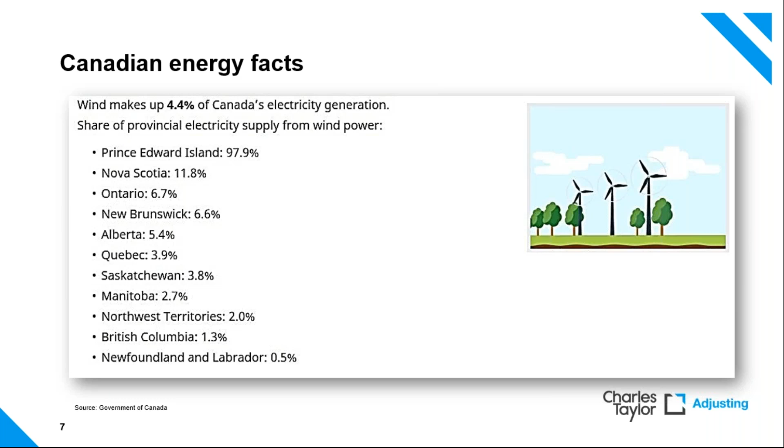We have done a number of claims in support of the insurance community, certainly in London, in a number of these provinces across the country, and certainly the most recent one was in PEI, the first one there. So we can see there's a very diverse but consistent share in the majority of those provinces.

Now, if we're moving on to claims, the dreaded word here, I'm sure there are people who deal in pre-loss on this call, underwriters or brokers and the like. Sadly, we're at the grubby end, as it were, of the claim side when things go less well than they'd hoped. And so this view here gives us some of the things that we've seen both in the European market and also in the Canadian domestic market as well.

Here's three generic kinds of damage, broadly broken down into blade damage, electrical infrastructure, and then drivetrain stroke gearbox failures. Blade damage itself tends to be one of those things which is perhaps more natural forces, act of God, that kind of thing—lightning strikes, strong winds, we see damage.

Erosion is one of those things which becomes a little more esoteric, on the basis that it tends to be more of a wear and tear point, in terms of the fact it's wind-blown debris, which either causes wear to the leading edge or the trailing edge of the blades. The blades themselves are composite and so forth, and they either have to be repaired or replaced. But we're not looking at specific claim issues here today—I just want to bring it to your attention that it's something we do see, and certainly on the older installations.

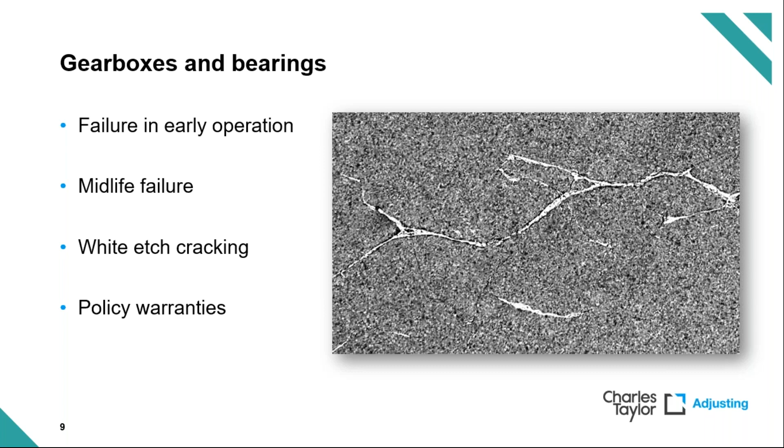Now, some of the opportunities and challenges that come with this - we've seen, and this is perhaps, we're talking onshore wind, I'd refer you to Canada and also North America for that state of the word. In terms of the concept to repair duration, clearly it's not a complicated structure. However, it's typically a tall structure, and typically in a fairly remote location. So what might be a fairly straightforward repair if taken in a metropolitan area, in a factory or other mechanical process or location, will take an extended period of time.

With that also comes the supply chain. You'll be aware that I mentioned earlier that a lot of the supply chain or the intellectual property sits outside of North America or Canada and comes from Europe. And we've certainly seen instances where that has significantly delayed claims, because things have had to be shipped both into country and then moved cross country to be able to rectify the problem.

One example that comes to mind exactly: dealing with a wind farm loss, relatively minor, in British Columbia, which took place in the late autumn, and due to the snowpack, it wasn't actually possible to fix the issue until the late spring. Now, supply resilience is something which probably wouldn't have even been mentioned 3 or 4 years ago in a presentation such as this.

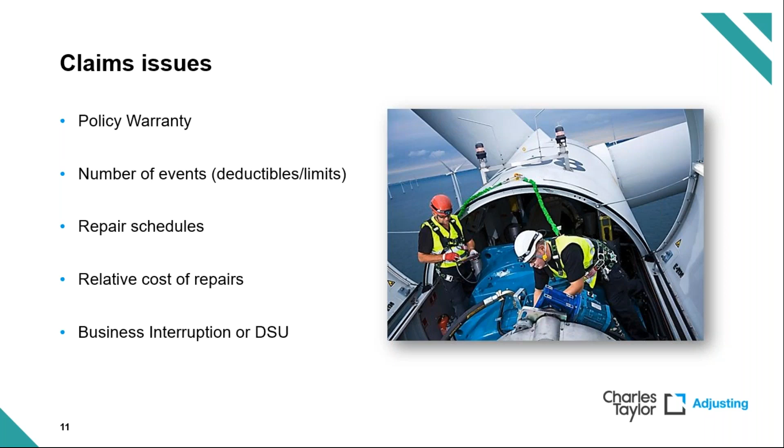In terms of that, then that neatly dives into the time-based element of business interruption, or indeed delay in startup, DSU. It's something that we see increasingly often. Maybe it's a sign of the times that often the business interruption here is perhaps a greater cost than the cost of repairs in numerous cases, and is something that we're well aware of, and therefore try and work with the insured to make sure that everyone is very clear on what the actual repair timeline looks like.

Now, just as a segue into perhaps more of our world in Europe of what this looks like, and to see the similarities, and perhaps based on what we said about the cross-pollination of offshore to onshore technologies, here is a schematic which shows, broadly speaking, how the two align. The first thing you'll probably notice is they're broadly similar. There are turbines, albeit the turbines are at sea or on some form of platforms or supports. There are array cables, exactly the same as onshore ones. The only major difference is there's typically an offshore substation and then an export cable to bring it onshore.

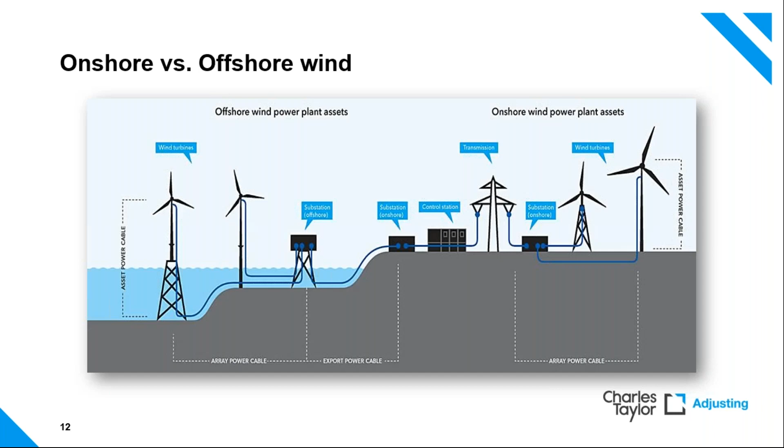Now, clearly, that doesn't happen in terms of the onshore facilities, but you could look at the export cable as being the overhead conductors on pylons. It's a similar idea. So I think what we're saying here is it's not that foreign, other than the fact that there is the marine component to it.

Offshore wind turbines, again, very similar to onshore wind turbines, just basically bigger is the best way to look at it. Again, a lot of this stuff is driven out of Europe with the main OEMs: MHI, Vestas, Siemens Gamesa, Amalgamation, etc. The typical new deployments are 8 to 9 megawatts, maybe 10. Although there was a piece in the trade press recently suggesting that the new development in the North Sea on the Dogger Bank, which is to the east of the United Kingdom, has an order placed for 14 megawatt units.

So clearly that is a substantial sea change in terms of size. And given that these are multi-billion euro assets in terms of the wind farm developments themselves, they're now very much seen as investment grade assets in Europe.

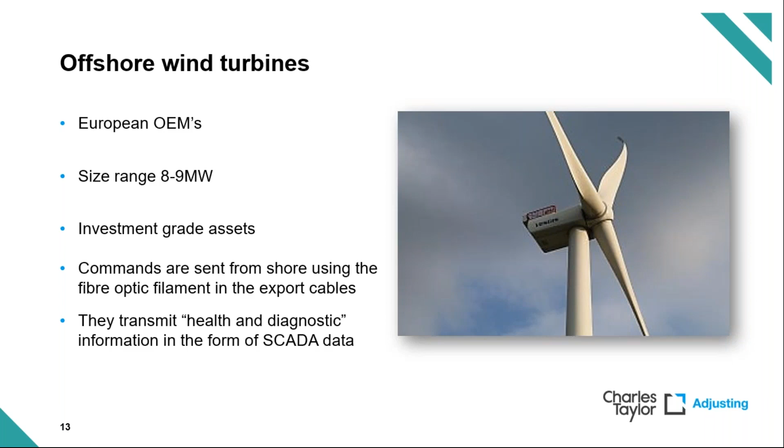Things like pension funds, financial institutions, and government bonds are buying into them, and that's largely how they're financed. On a more operational level, they're run from shore. All of the command and control is done through fiber optics, through the export cables, because it's expensive and somewhat challenging to bring support staff out to these turbines to run them. Anything that can be minimised, it certainly is. Also, similar to many onshore turbines, the health and diagnostic monitoring is run through standard SCADA data, which is something we look to use when it comes to claims to understand the cause and effect of these losses.

Now, this is clearly offshore, a marine environment. When things go wrong, or even to construct these facilities, you need specialist vessels. This here is one such vessel - you can see the 6 legs, which basically makes it a mobile jack-up platform. There are things to consider here: the origin, suitability, availability, and cost of these things.

The reason I bring this up is the direct comparison with the Canadian market is craneage and lifting - this is a mobile crane ultimately. To build these larger onshore turbines, you clearly need a next generation of craneage. Is it suitable for the job, i.e. can it lift high enough? The availability - they're always in demand - and the cost of them is undoubtedly expensive.

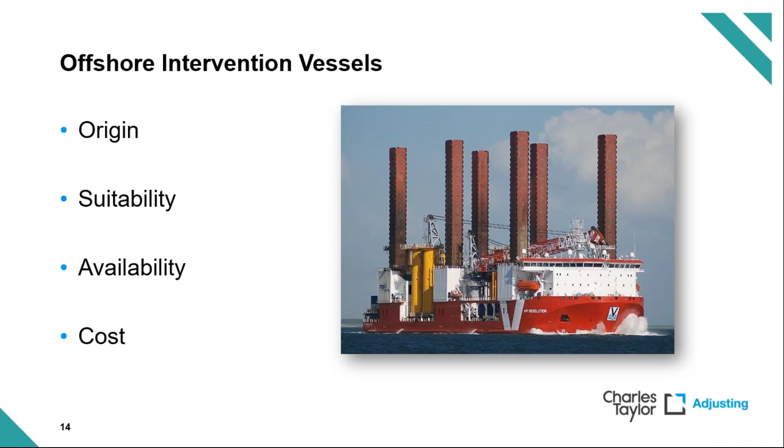So whilst there may be a minor issue going forward in a specific wind farm which requires some work in the nacelle - a relatively simple operation - getting the equipment in place may substantially increase the cost, albeit on a relative basis, because it doesn't involve the cost of hiring or chartering a marine spread.

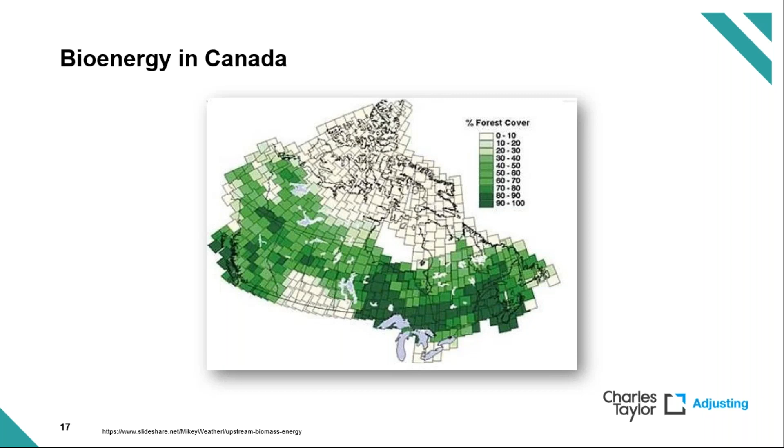Now, whilst clearly the United Kingdom is not blessed with the same amount of forestry, bioenergy does exist in the UK in a similar way, and we get involved in it. I won't lie to this audience and say we do huge amounts of this work in the UK, but our colleagues in Canada do more work on this, and there are some very interesting and tangible points that come from it.

In terms of bioenergy that we see in Canada and the UK in general, there's that whole waste-to-energy point - reusing waste combustibles to fire power stations or energy production facilities - and that also rather neatly goes with the symbiotic energy generation we see in facilities that use offcuts or produce offcuts or waste combustibles.

May quite often find it's useful to have a small facility which is able to turn that waste energy into electrical power, either for their own purposes or to sell as an additional source of income, and also to assist with environmental credentials as required, if there is indeed a way that's how they are measured.

One of the interesting areas, and we've certainly seen this in Canada as well as in the UK, is the concept of repurposing fossil fuel power stations. The point is trying to move away from a carbon-based economy. Clearly, if you can't move away overnight, there are large installations in place which have a lot of capacity requirements for the grid. So there is perhaps a realism which needs to be applied about how that actually is repurposed.

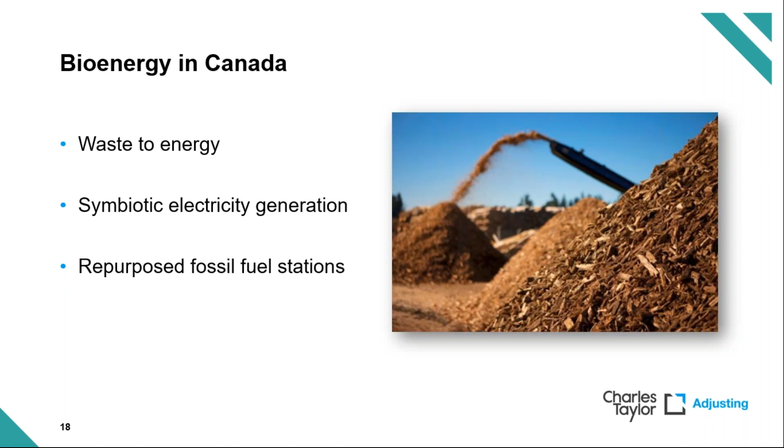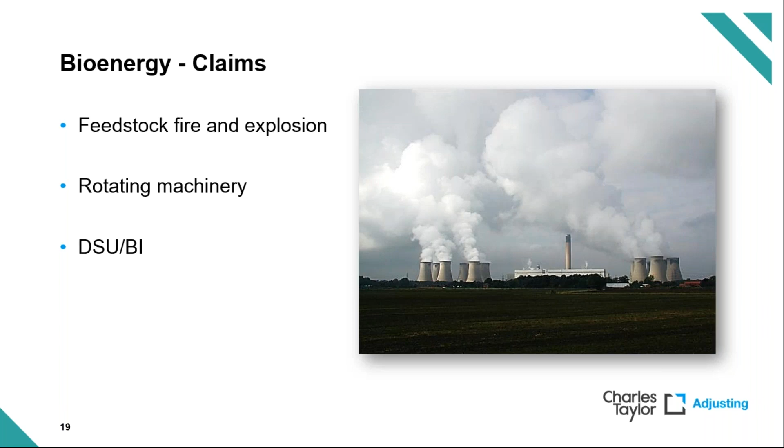That said, what we also see is the type of claims, which is feedstocks, as in dust explosions and that sort of losses which come from that point. Rotating machinery, which is common of any power station, and I believe our Canadian colleagues will be putting on a similar presentation in the coming weeks focusing on that point, rotating machinery. And the big cost which comes out of this is either DSU or predominantly BI costs on that point.

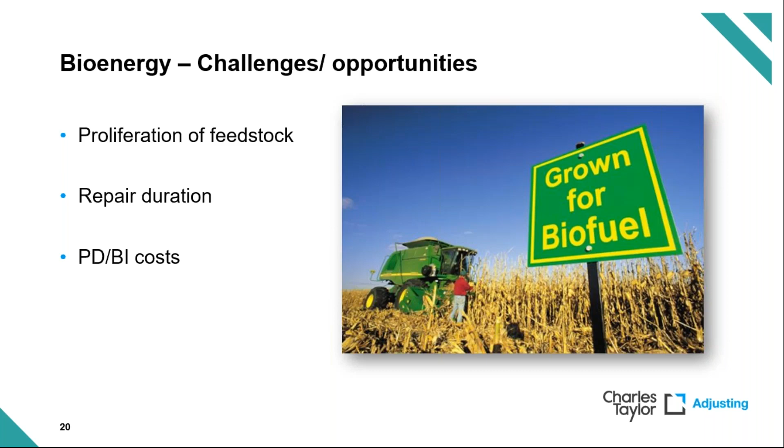Finally, on this section here, we're looking at the challenge and opportunity. Certainly in Canada, there's a large amount of lumber production and the likes. There is a proliferation of feedstocks, which perhaps we don't have in the UK in such proliferation. Those repair durations that we've got on principal generating assets can take a long time, and when they do, they have a major impact on generation, which transfers potentially into significant insurance claims.

Now, at this point, I'm going to hand over to my colleague, Neil, to talk briefly about solar generation.

Hi, everyone. I'm Neil Armstrong. I've been working alongside Ed Hillier in the London office for the past 2 years, especially on small to mid-size onshore solar and wind installations, but also working alongside Ed on the larger offshore wind installations as well.

I'm just going to do a brief overview on solar generation and some of the claims we see and the challenges behind them.

Now, in Canada, what we've seen over the past 10 years or so is from 2010 to 2020, the installed generating capacity in Canada has risen from around 250 megawatts to over 3,000 currently installed. Much of this is actually located in the province of Ontario, as they were one of the first to introduce a feed-in tariff, which really garnered interest in installing solar energy.

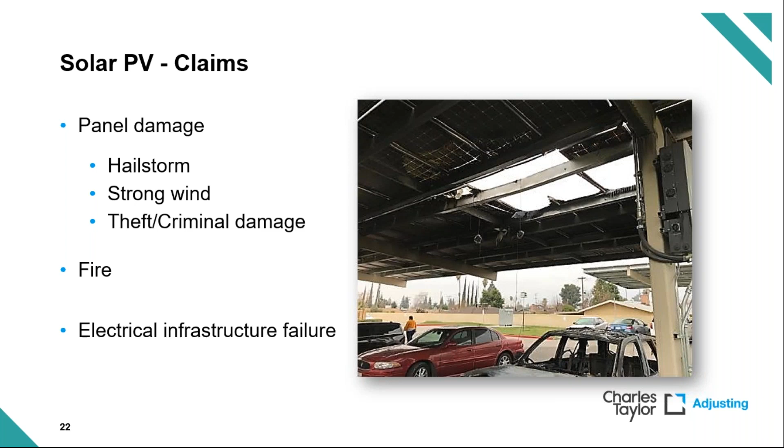So why solar? Now, solar overall in Canada represents a very small proportion of Canada's generation capacity. I believe it's around 1% of overall generation capacity.

However, some of the opportunities for solar power include the fact that you can install it relatively simply and in a short time frame, especially in remote areas where facilities require power. It takes a lot of time, effort, and cost to connect those to the national grid, whereas setting up a local solar facility to power individual locations is actually more cost effective.

Some of the benefits of solar power in terms of claims: often if the materials and logistics are available, they can be repaired very quickly. Unlike, as Ed was saying earlier, with wind turbines, you don't necessarily need large capacity cranes. Everything can be done with relatively small plant and minimal labor.

Also, the locations of solar vary widely. We talked earlier about potential remote locations, which can present challenges similar to wind turbine claims, in terms of snowpack or just access to the location to proceed with repairs. However, we also see solar installations in urban environments on top of buildings, where access is relatively easy. You've got road infrastructure to bring spare parts, and generally more technicians in the immediate area. So it really varies depending on location, and we see repair duration varying massively between sites.

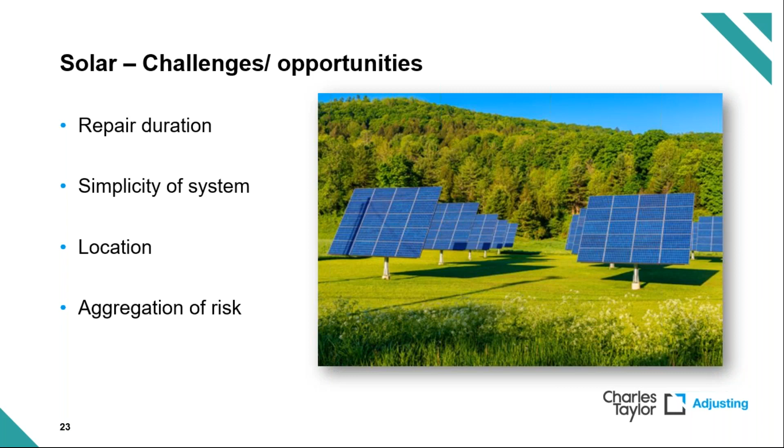Thank you, Neil. So in summary, we trust that's been a useful overview of the market from a technological point of view. We want to bring up these 5 points for the audience to consider at their leisure. Firstly, and in numerous areas, but more so in offshore wind, is technology a major driver in this.

In terms of energy storage, that's the next big change, and how the energy industry embraces that, whether battery storage, compressed gas, or the like, will be a game changer. In Europe there's a huge amount of work going into this, as there is in different parts of the world, about storing energy from renewable sources in a manner deployable at the time of choosing. Those supply chain challenges remain and will be extant until this industry develops more manufacturing bases in North America and Canada to support the growing industry there.

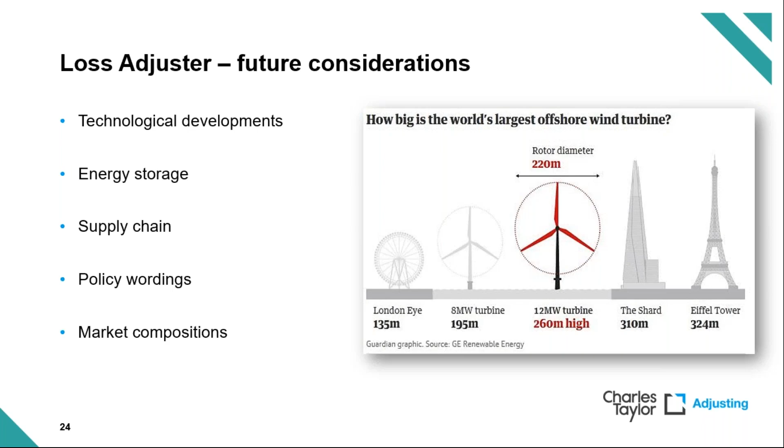Good morning, good afternoon. I'm Wally Matthews. I'm with the Charles Taylor's Calgary office. I'm pleased to present a case study that we were involved in just last year.

The claim that we're involved in involved an 88 megawatt wind farm. This 88 megawatt wind farm, just to put it in perspective, can provide power to 26,000 households. The height of the wind turbine towers are only 80 meters, nowhere near compared to what you've seen in previous slides presented before this. The reason behind this loss was that the bad guys just wanted financial gain through stealing copper ground wire.

This all occurred within a 5-week period. We're pretty certain that all the thefts occurred between midnight and 5 a.m., but the only one we know for sure is that they accidentally cut a fiber optic cable at one of the turbines, at 2:26 a.m. Other than that, we're just guessing as to the time.

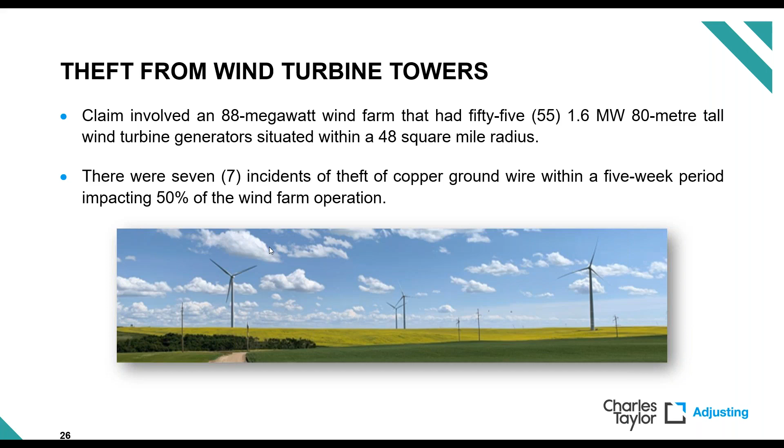The reason why we know they used a battery operated grinder is that after the first 2 thefts, the RCMP found some of the stolen copper wire, identifiable by the particular jacket or insulation on the insulation covered cable. So they found it, and charged 3 adult males for the first 2 break, enter, and thefts. But the bad guys were released after being charged to await trial. So guess what happens - the thefts continue. That's probably why there was a 10-day period between the second and third incident.

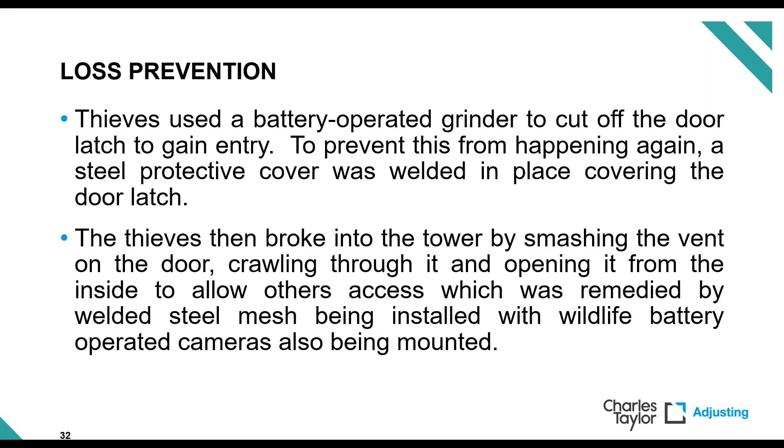So what has happened here is the police have charged the 3 adult males with theft. We're not certain if they're convicted or not. The police was requesting restitution of all damages. However, recovery is highly unlikely.

The bad guys, and we did get some preliminary information from the RCMP on them, were unemployed, had no assets, beat up trucks, and so therefore any type of recovery was highly unlikely.

Now, we did also have to deal with another issue, and that was the service agreement with the operator of the wind farm. There was a possibility the owner may have been able to pass on some of their financial loss that wasn't covered by insurance to them, but they elected not to, to maintain a really good working relationship. And the fact that the havoc created by the bad guys was really unusual, and they had no contingency plan to deal with that at that time.

As a matter of note, the salvage value of the stolen copper was determined to be less than $10,000 Canadian, and likely impacted that wind farm for a financial loss of over $1 million. Thank you.

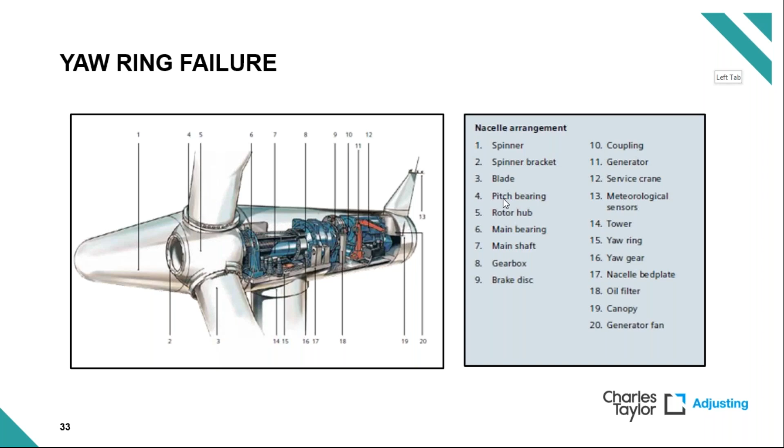The function of the yaw mechanism is to rotate the nacelle into the wind in order to optimize the turbine generating capacity, and to angle it away from the wind to prevent damage if the wind speeds are too high. In this model, there are 8 yaw gears, such as the one depicted in this diagram, which are essentially motorized mechanisms fitted with hydraulic brakes that rotate the yaw ring. The yaw drives are linked to SCADA, which constantly records turbine data from the turbine.

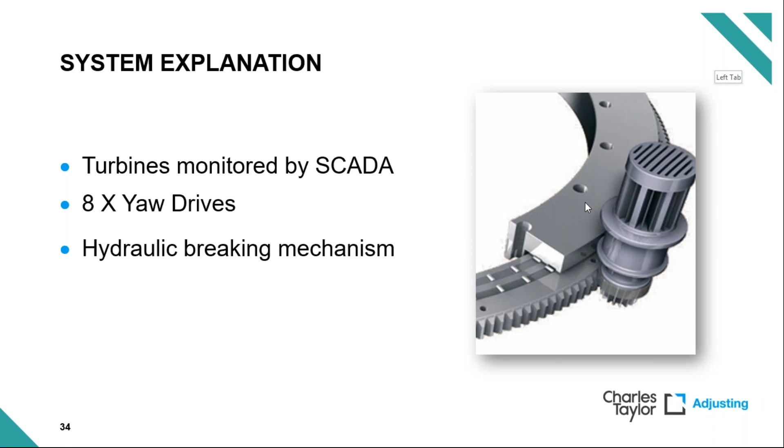In this case, the manufacturer of the turbine was also the systems operator, and the manufacturer was contracted under a service and maintenance agreement. The owner recorded a SCADA overheating issue with respect to the yaw gears on day 1, which is the baseline date for recording of damage.

The service provider's technicians inspected the yaw gears this same day and adjusted the brakes. The turbine was then placed back into service. The 4th annual inspection of the turbine was carried out by the service provider's technicians between day 7 and day 12.

During the annual service, the technicians noticed 2 out of the 8 yaw gears were damaged, but didn't notice any damage to the yaw ring. The turbine was again placed back into service.

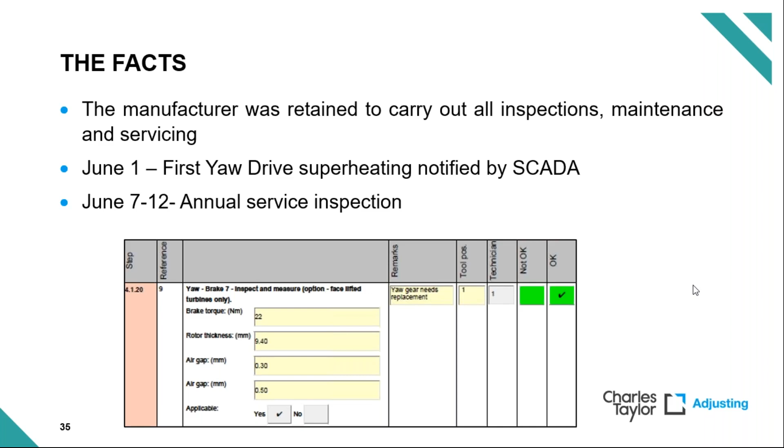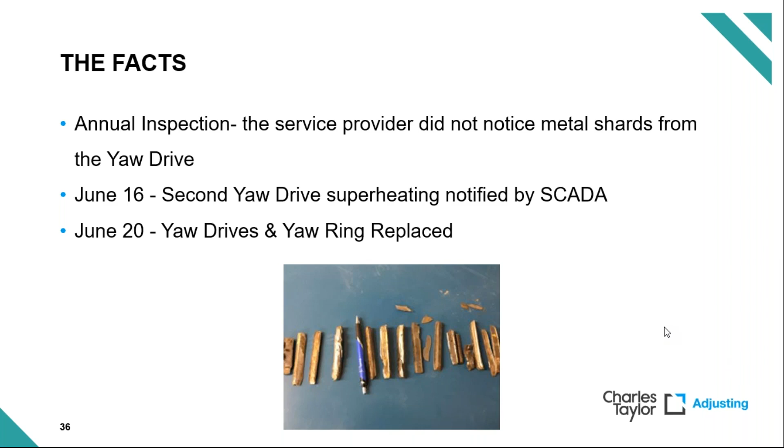So all we had to rely on was the evidence of damage to the yaw ring, the shards left behind, and the SCADA data to piece together what had happened.

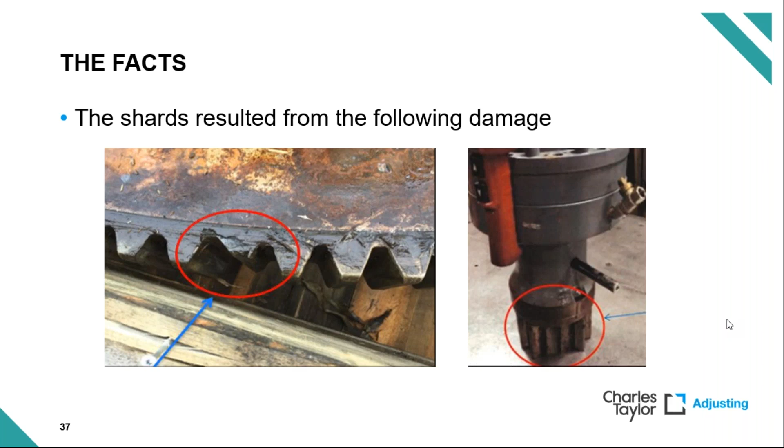Like all good investigations needing root cause analysis, we engaged forensic engineers. Case crushing of the teeth was diagnosed by the forensic engineer. Now, there are two plausible explanations for case crushing: one being metallurgy of the damaged teeth, and two, overloading of the teeth.

After reviewing the SCADA data and on the balance of probabilities, it was decided by the forensic engineer that case crushing was caused by incorrect application of the braking mechanisms. And the claim was paid, including the business interruption component, as the all risks policy didn't exclude this type of damage.

We then needed to look at the prospects for recovery. The manufacturers made a promise of a robust and reliable design, and that the model was designed to last. But the preferred explanation of the forensic engineer precluded any prospect of recovery against the manufacturer, particularly as the damage occurred one year out of warranty.

We then looked at the performance of the service provider, who, remember, was also the manufacturer and also the supplier and installer for the turbine, for a potential failure to detect damage during inspection of the brakes and during the annual inspection. So we called for the service and maintenance agreement, and these three clauses stood out.